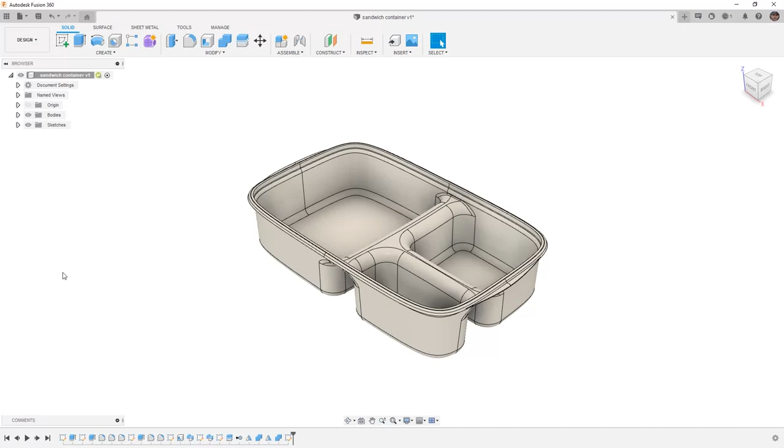In Fusion 360, we want to get started with the supplied dataset, sandwich container. Oftentimes, when we're working on new designs, we have to use surfacing tools to get the geometry just right. In this case, we're dealing with a plastic molded sandwich container. We need to add some indent features on the bottom to add a little bit of structure and give it a way to nest into another container.

In order to do this, I'm going to start by expanding my sketches and showing my split sketch. The split sketch is going to allow us to split the bottom face, and this will give us an area to work in. This bottom sketch has an offset from the edge, and it allows us to see different areas where we're going to have a recess or an indent and a transition area.

In order to do this, we're going to start by going to Modify and Split Face. We're going to select the bottom face of the container, and when we go to select our splitting tool, we're going to begin by selecting the outside and saying OK.

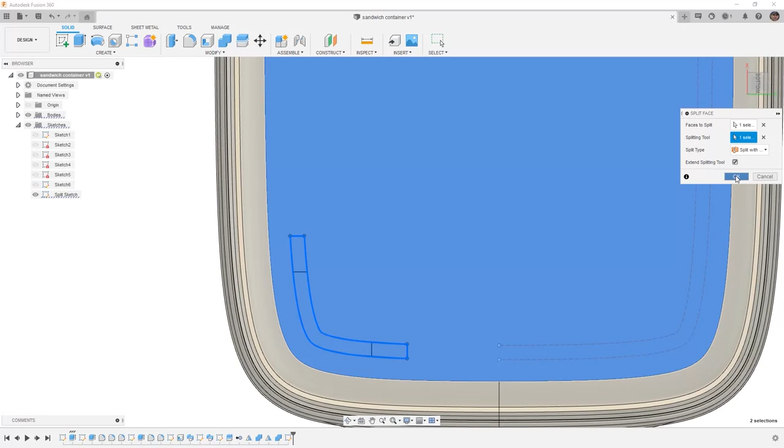We'll need to bring that split sketch back, and we'll need to use the split tool again. This time we're going to select the inside face, and the tool is going to be this inside edge. And we'll repeat it one more time, selecting the inside face again, and this inside edge here.

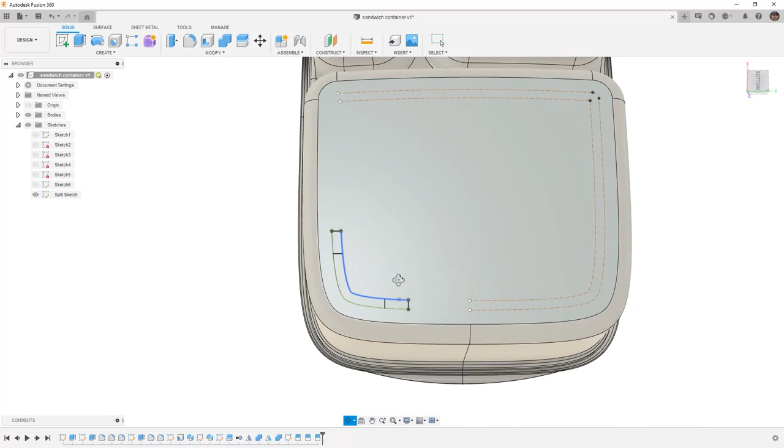The reason that we need to do this is because we want to identify the areas that we want to modify the geometry. So the first thing that we want to do is we want to talk about the use of the delete tool and how it's different when we're in our solid tool set versus our surfaces.

For example, if I were to select this face and simply hit delete, Fusion 360 patches the surrounding geometry for me. If I use undo, navigate to my surface tools, and I select that same face and hit delete, it's going to remove the face from our geometry, and it's going to turn this into a surface body.

If we expand our bodies folder, you can now see that we have a surface body made up of 223 different faces. We're going to select and delete that other face as well. And then we're going to use our offset tool under create to offset this small face.

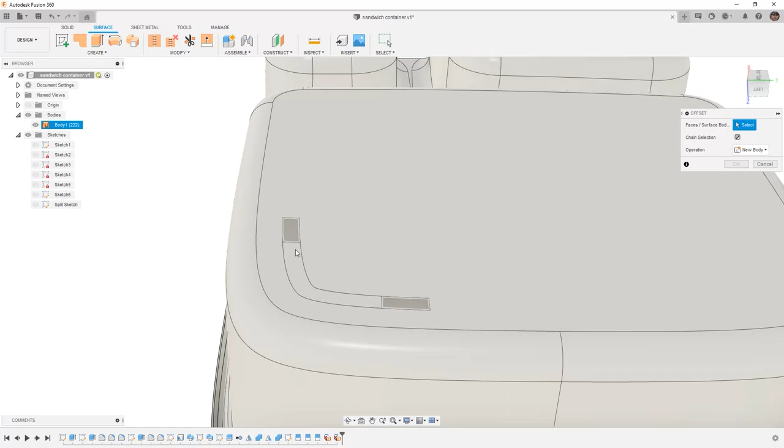When we make that selection, notice it's trying to grab everything because chain selection is on by default. Really, we just want a single face. We're going to bring it down a distance of 1/4 millimeter. That's very small, but oftentimes when we're dealing with molded plastic components, a small amount of geometry can add a huge amount of structural integrity.

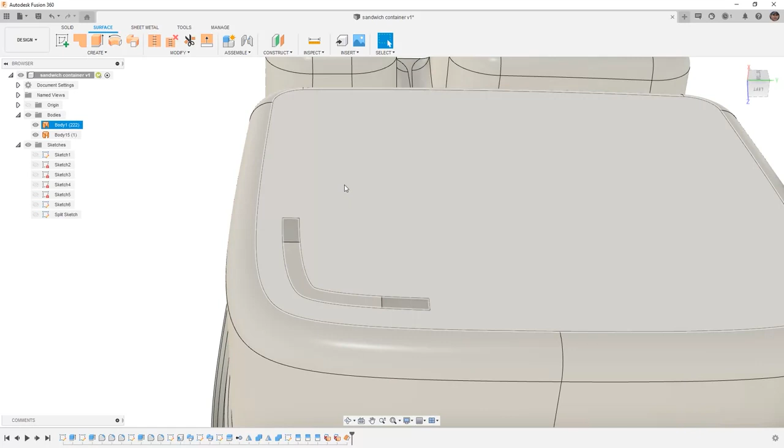So with that new minus 0.25 offset, I can then select the original face and delete it. When we're looking at this, we now have a small offset face that's on the inside. And when we hover our cursor over these edges, because we originally split the faces up multiple times, what we now have is a division here or a vertex that we can select when we're going to create the transition between these two.

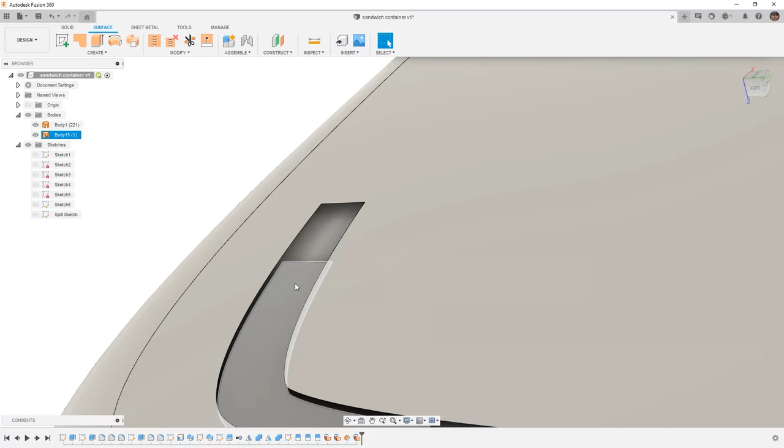The next thing that we need to do is we need to consider whether or not this geometry needs draft. If it does need draft, then we need to reduce the size of the shape. There are tools such as Extend that can be used to change the size or shape of different surfaces.

If we select the edges of our surface, I'm going to grab the inside and outside edges and begin to drag them in, notice that it's not allowing me to reduce the size. However, if I drag them out, it will allow me to extend them. So because of this, it's not allowing me to create that offset.

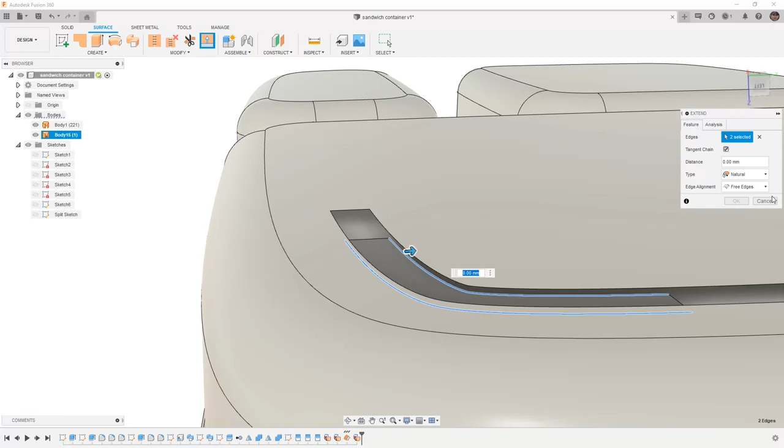I'm going to need to use split or trim to remove additional material. So I'm going to right click and create a sketch on this. Then I want to use my offset tool.

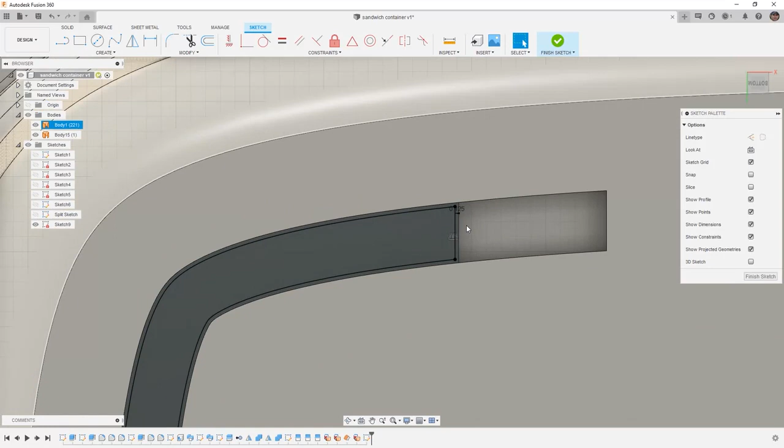I'm going to select the entire outside profile and I'm going to offset it in a small amount, in this case minus 0.125. That small amount, I also want to make sure that I take a line and I extend it out tangent all the way to the original edge. Because I do have that vertex selection on the outside, I want to make sure that I maintain that position.

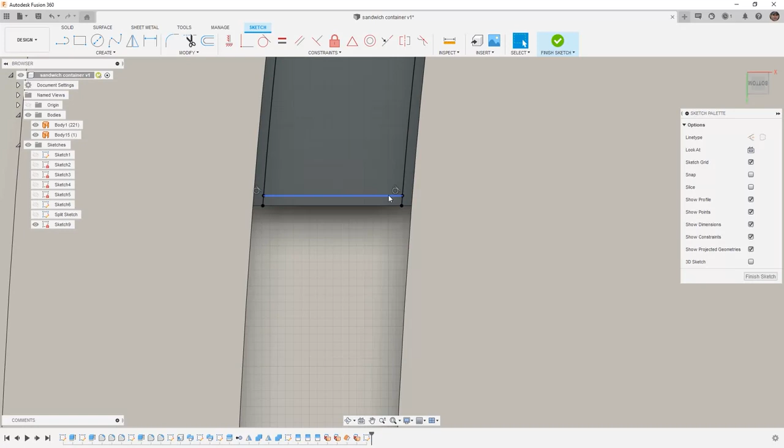This needs to happen on the other side. Once again, I'm maintaining tangency with that original edge. I'm going to hit escape. I'm going to select this line and I'm going to convert it to a construction line. We'll do the same thing on the other side, making sure that that is not going to be a valid selection. We'll finish the sketch.

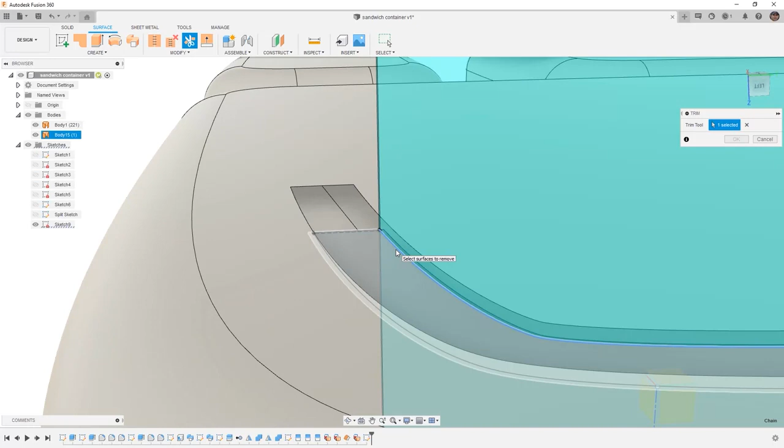And now we can use our tool, such as trim, to remove additional material. We're going to start with our selection being this edge, and then we need to select the area to trim and say OK. That sketch is still visible after the trim tool, so we'll rotate slightly and we'll repeat the trim. We're going to use this as our trim tool and remove that small area on the outside, and then we can hide that sketch.

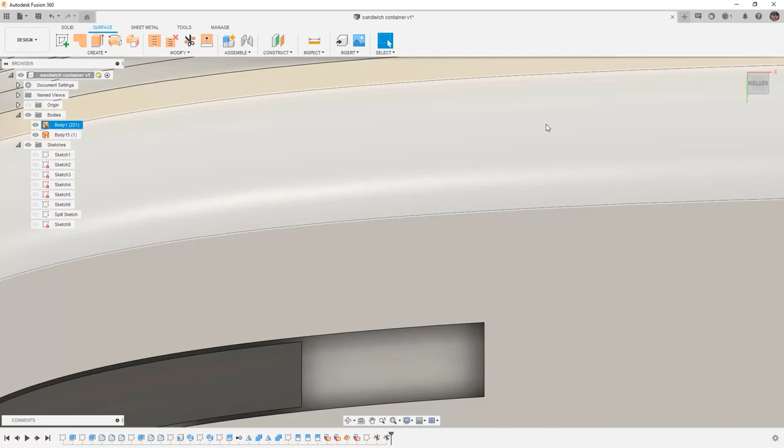Now let's rotate around to a bottom view, and if we want to, we can also rotate this. Now we can see that this offset surface is slightly smaller, and this gives us a great opportunity to create a loft between those faces.

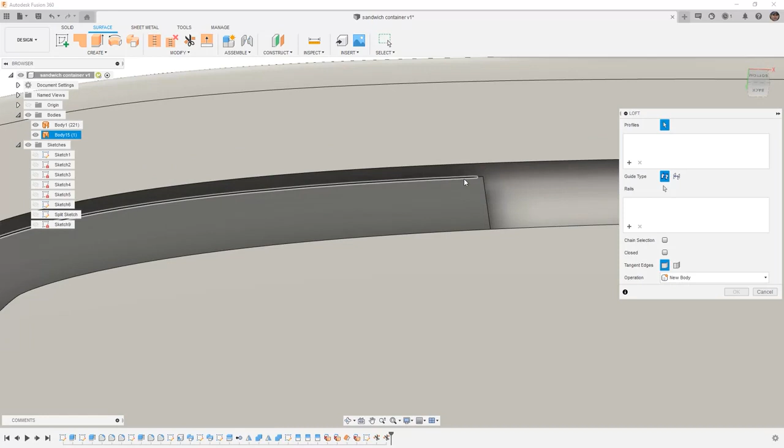I'm going to rotate this around and take a look at my Create tools. Loft will allow us to go between two selections. So first, I'm going to select this edge, but we need to keep in mind that we have these small sections on the outside. So I want to make sure that I grab all three sections for that initial profile. And then I'm going to hit plus to create a new profile selection and grab this edge.

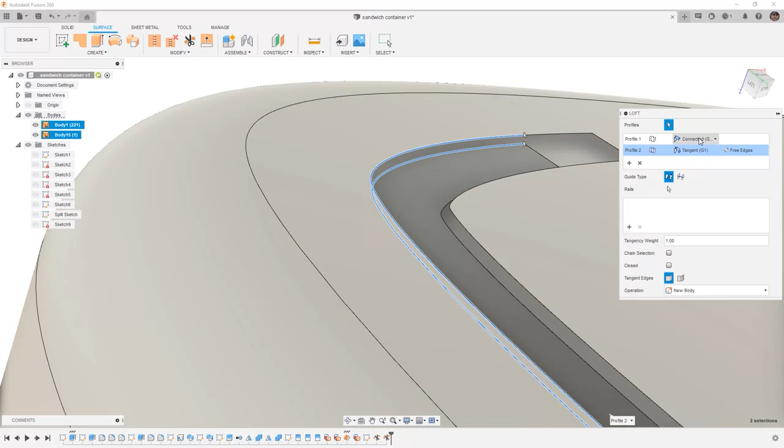When I take a look at this, you'll notice that it is creating a new surface. We'll have to rotate around to see it because of the colors, but you'll notice it's connected at the top and bottom. If we want a smooth transition, we can add tangency to both of those, or curvature.

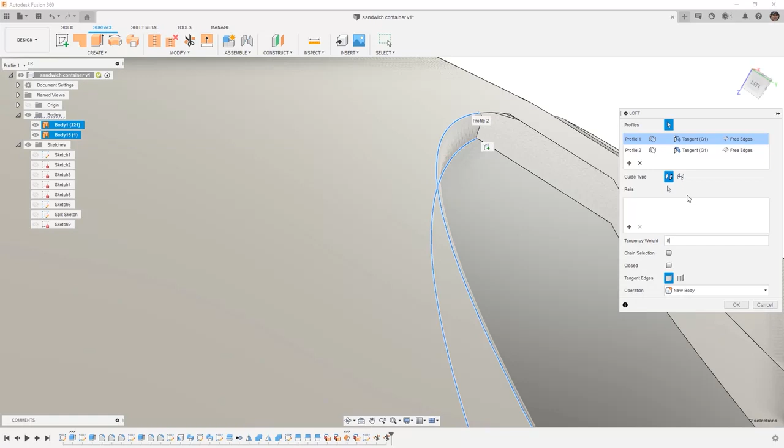In this case, I'm not going to add curvature simply because the faces I'm dealing with are flat or planar on the bottom of the container in this offset. But notice that when we do have that small amount of transition, we can also affect things like the tangency weight to reduce that if we only want a very small amount of that transition.

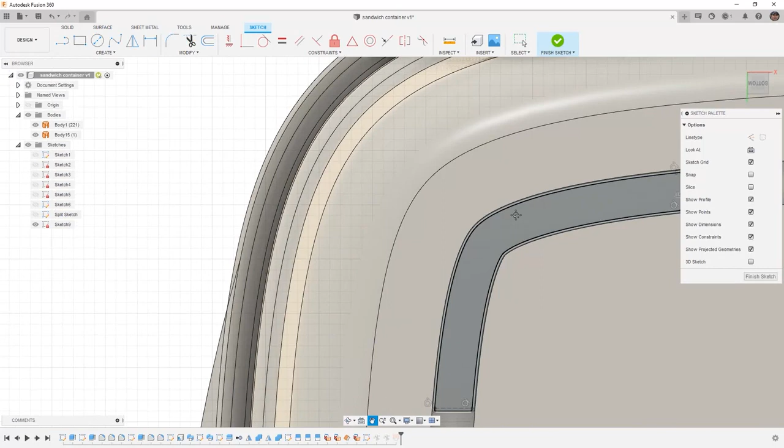We can also go back and increase the offset where we were creating that transition. Instead of using 1/8 of a millimeter, we could make it a larger offset. To do that, we simply go back to Sketch 9, edit the sketch, and take a look at that dimension. So in this case, that minus 0.125, I'm going to go to minus 0.3.

I'm going to finish the sketch, and then I can go back to my loft, select those tangencies, and now I can increase that back to 1, or make it even larger if I wish. I'm going to increase this to 1 as well and say OK.

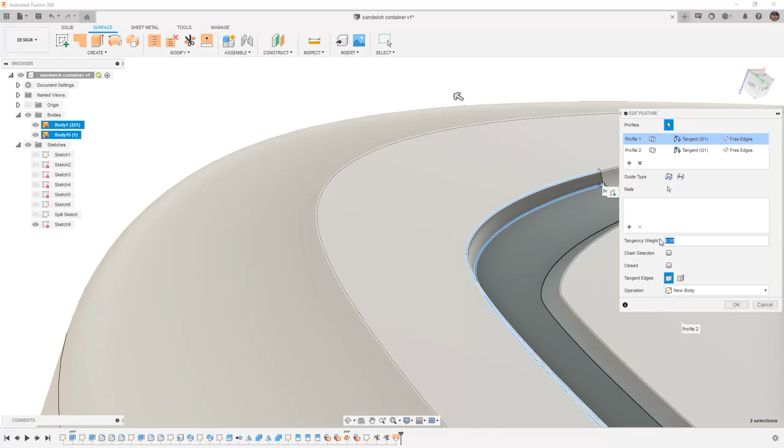We're going to follow that same procedure on the other side, creating a new loft. Once again, we need to make sure that we select all three of those sections for that profile. And then for our second profile, we simply need to select that inside edge and make sure that they are tangent.

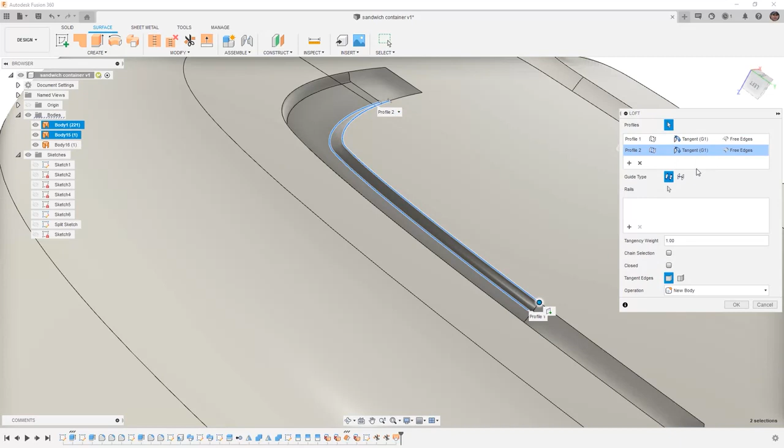Now that we have those two selections, let's go ahead and use a tool called Stitch. We're going to stitch these three sections together, and we want to combine them with the bottom of the housing. This leaves some open areas, and that's okay because we still need to fill those in.

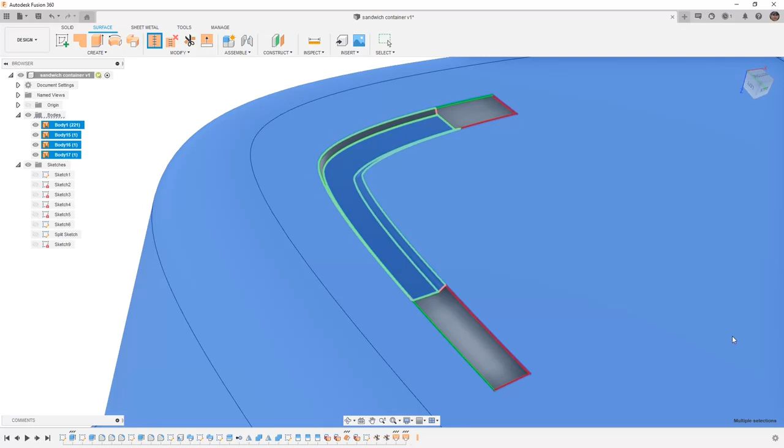Once we combine those, we can go back and create a new loft. We're going to select this edge as well as this edge. And note, if we view this from the bottom and bring this into focus, we can actually take the end points and drag them in so that the loft isn't going all the way to the edges.

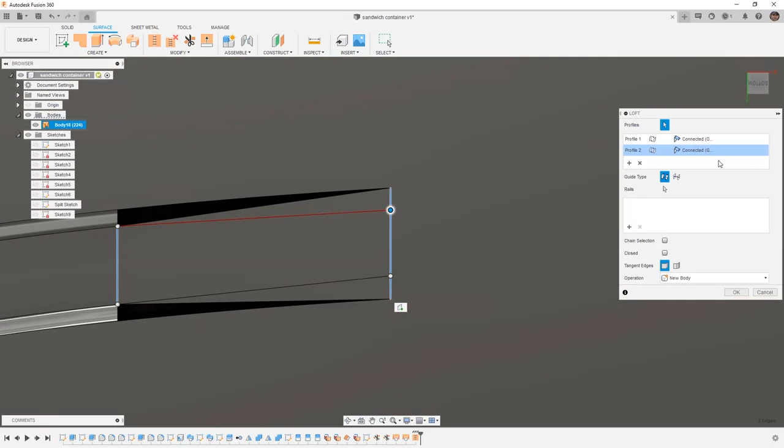When we do that, we also want to make sure we are adding tangency. When we drag those edges in and say OK, what we've actually done is created a division that we can select and delete, leaving just that small section.

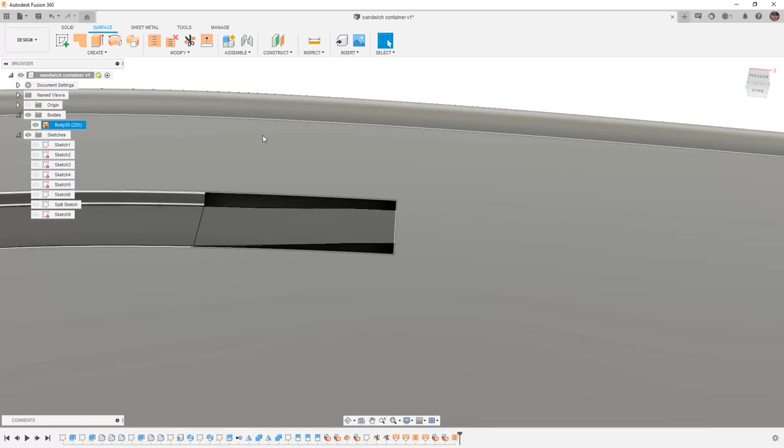Once again, we want to stitch, selecting everything to combine it together. And now we can use another tool called Patch to fill in this open area. We're going to group all the edges together so that tangency applies to all of them, and say OK.

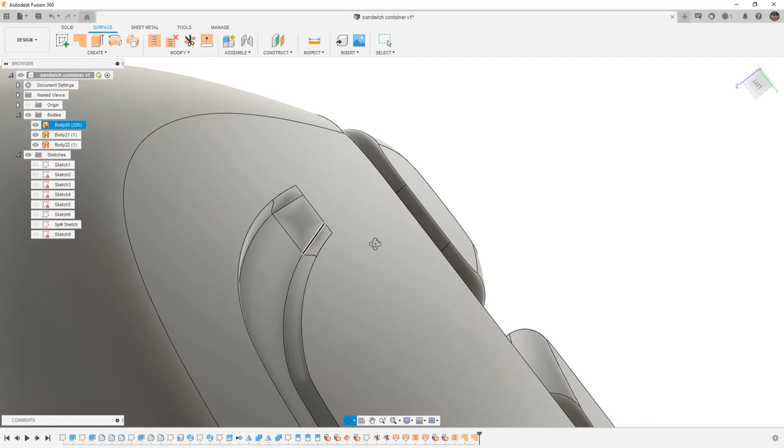Repeat the process by repeating the loft on the other side. All the edges are grouped, and we'll add tangency and say OK. So now we've added these smooth transitions. We want to stitch those together.

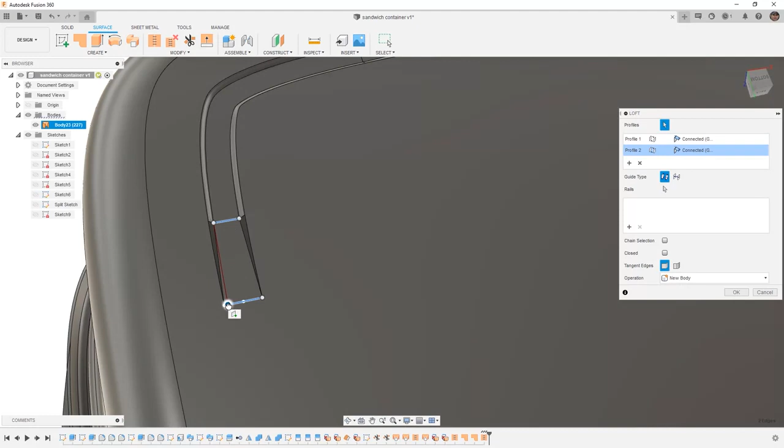And then repeat the process one more time on the other side. As you can see, the process of creating this geometry does take a little bit of time. The good news is that once you create these surfaces, you can go back and create patterns or mirrors based on the way your original geometry was created.

I'm going to say OK. I'm going to delete these edges. I'm going to stitch everything together. And then I can use my patch tool to create that surface patch in that area.

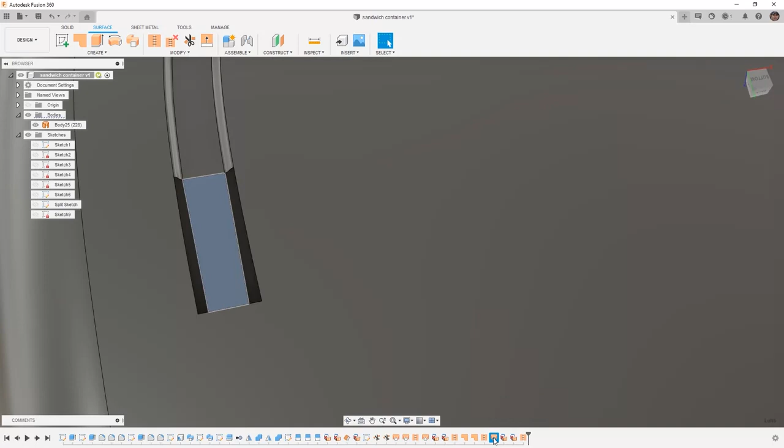Once again, it's important that we always go back and remember that when we create this loft, we always want to be mindful of how it connects to our surrounding surfaces. If you forget to create that tangency, what's going to happen is downstream, you're going to get areas of your surfaces that are not going to be smooth.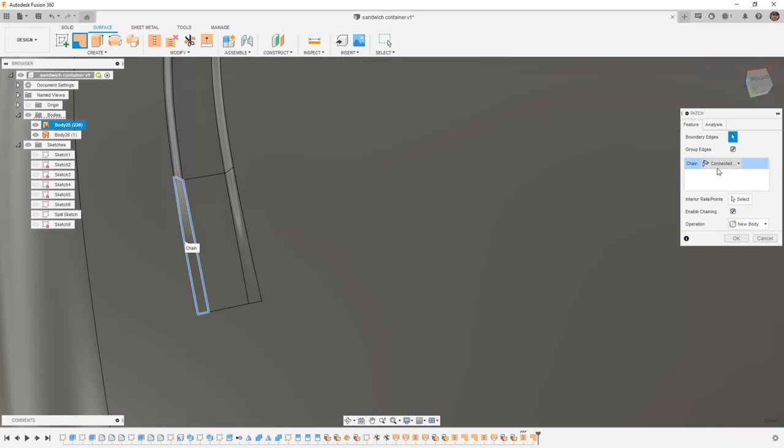Once again, we'll make sure that everything has tangency. We'll repeat the process one more time on this side, and then we'll stitch everything together.

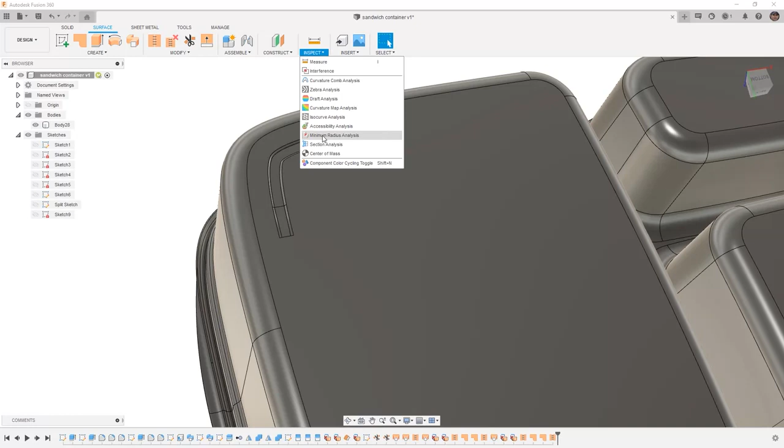Once we stitch the main body back together with these two surfaces, let's pay close attention to what happens in our bodies folder. Once we say OK, because we've now created a closed region, it converts it back into a solid body. This means that we can come to inspect and take a look at a section analysis.

In my case, I'm going to select the YZ plane. I'm going to drag it over until we get into that geometry. Now we can take a look at how far into our container that goes, and whether or not we need to create the same sort of indent on the inside.

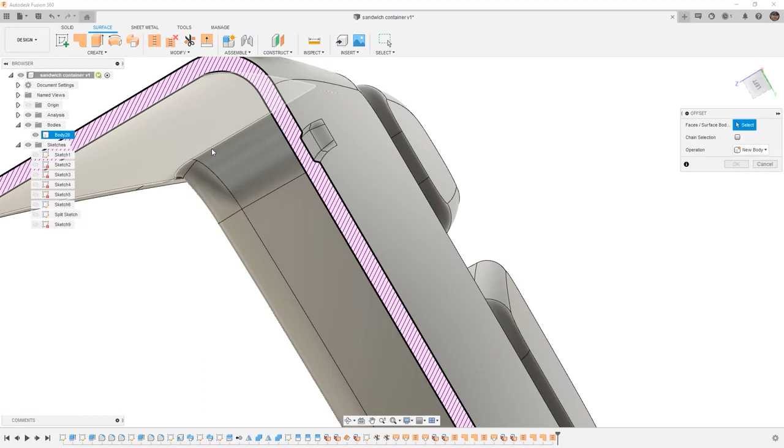If we want to do that, we can use our offset tool, and we can take our surfaces that we're interested in and offset them inward, then repeat the same process, creating those splits and those new lofts and patches on the inside of our container.

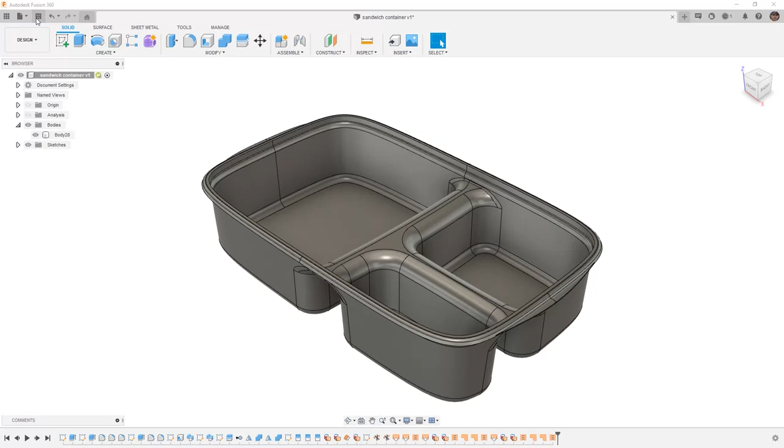For our purposes, however, I want to go back, hide the analysis, make sure I navigate back to my solid tools, minimize my sketches folder, and I want to save this design before moving on.